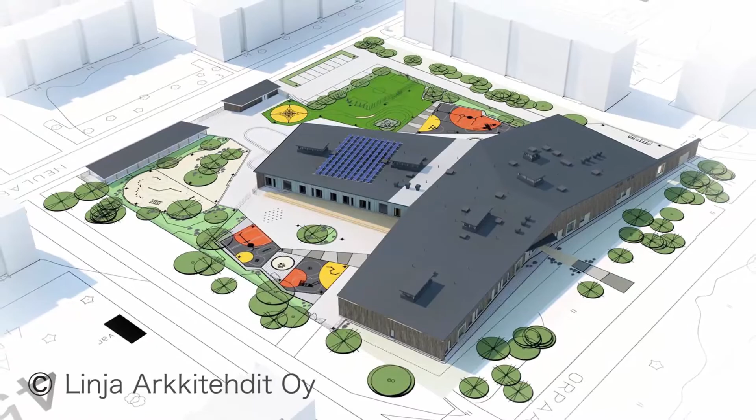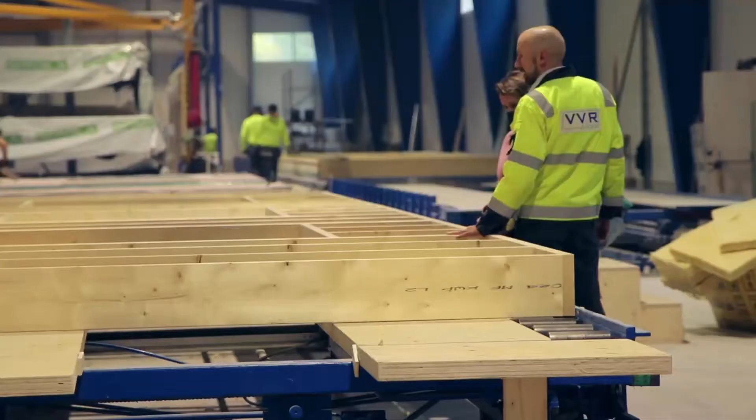Our element production process starts with the architect's 3D model, and we break walls and slabs into different element types and then design those elements. Typically our models can have hundreds of different elements and tens of thousands of different parts. And we have to make sure that this information flows through the construction process and is usable in every process.

Archiframe is a very important tool for us because we design everything that we do using Archiframe.

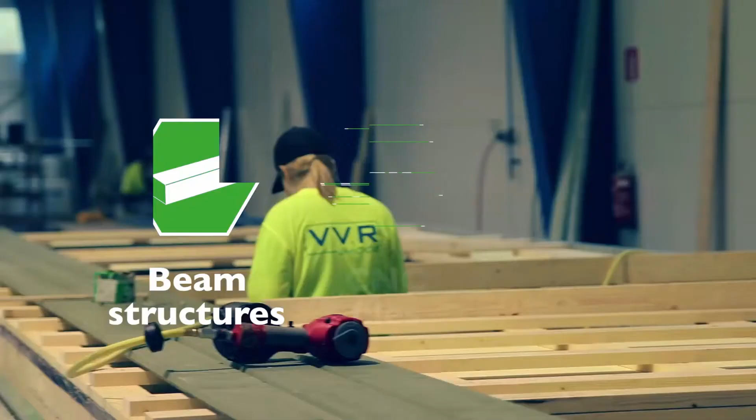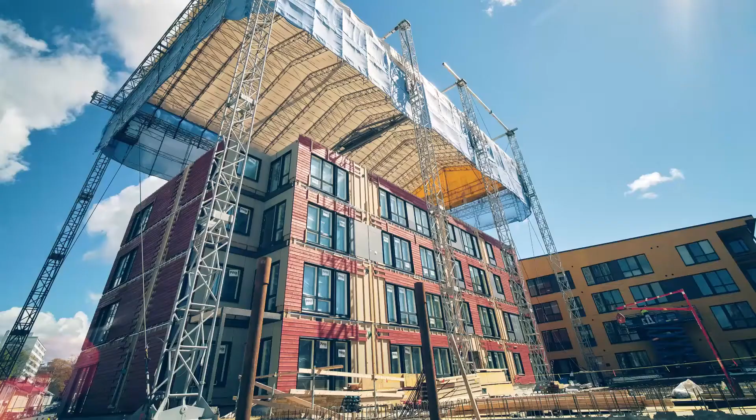One of the most important features of Archiframe is the flexibility of the program. In our projects, typically we have many different types of elements, and the construction types are changing in every project. So we have to be able to make different element types, different drawing layouts, different parts. And the flexibility of Archiframe allows us to define the element types by ourselves and change them according to our needs.

For us, Archiframe is a digital tool, an important part of software automation, which helps our designers make the routine work faster and more accurate, so they can focus on the most important parts of the project.

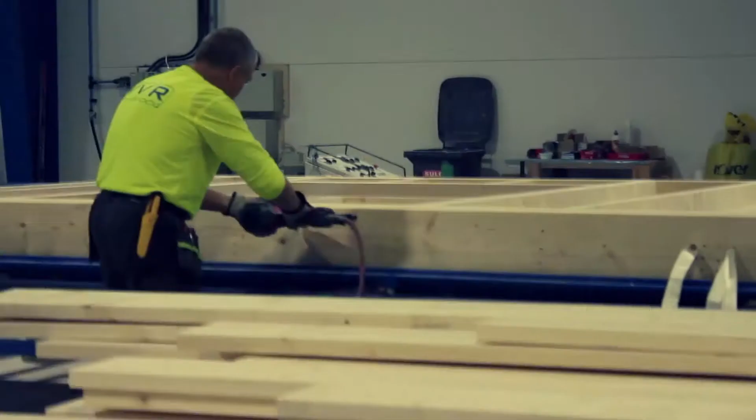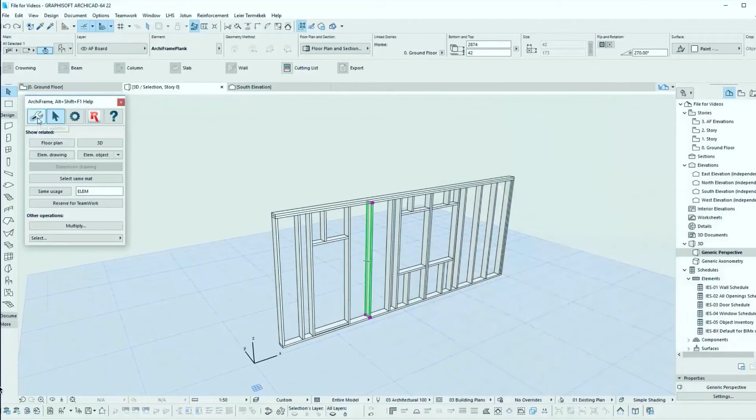In choosing Archiframe, one of the most important aspects was the strong integration with ArchiCAD. It's software which is used in a lot of architectural design offices, and this strong integration allows us to work more closely with the architects, and also we don't have to give other designers so many restrictions and guides to be able to integrate with our design processes.

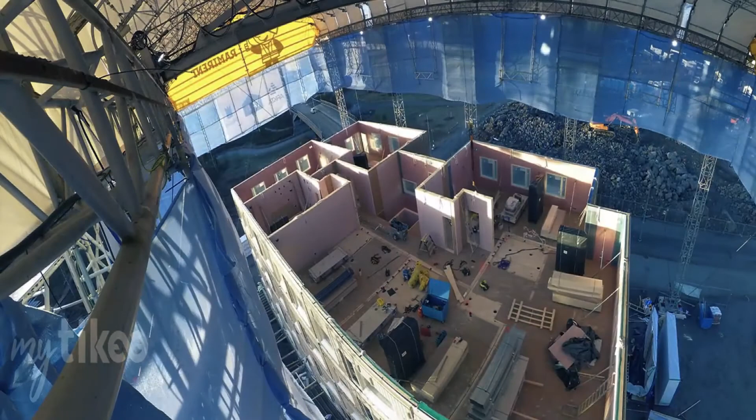Every project is different, and we have to be able to meet our customers' needs.